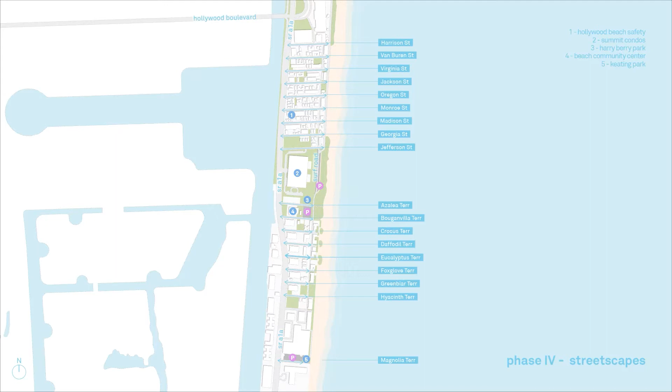Hello and welcome to the Eucalyptus Terrace Undergrounding of Overhead Utilities and Streetscape Beautification's Conceptual Design. In this video, we will be highlighting the upcoming changes occurring on this street during the Phase 4 Undergrounding of Overhead Utilities and Streetscape Beautification project.

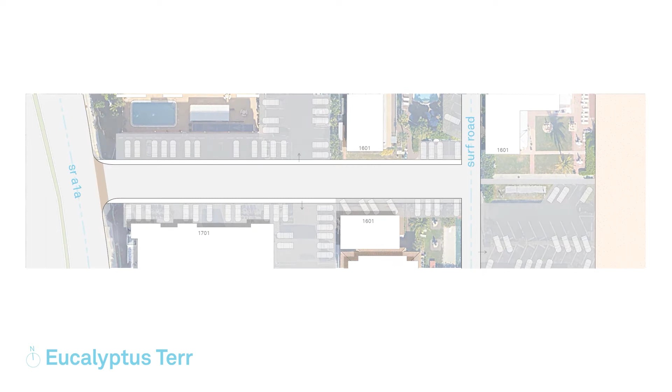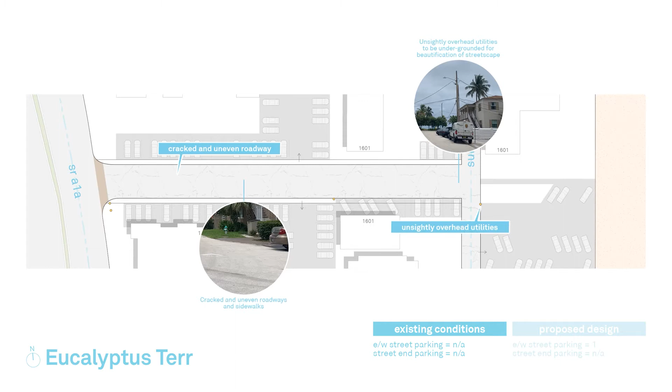These images illustrate the existing conditions both at the street and the street end. The information provided is based on conceptual designs and is subject to minor revisions during the engineering, regulatory, and construction design phase. Currently on the street, there are unsightly overhead utilities along with damaged patches of asphalt on the roadways and sidewalks. The existing streets are two-way traffic with parking on both sides of the street.

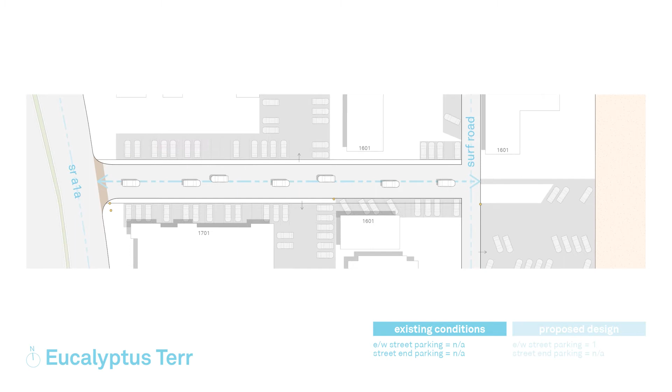Due to the nature of implementing the undergrounding of overhead utilities and streetscape beautification, the parking spaces, regulatory agency oversight, public lighting, and landscape improvements will be markedly different than the current conditions as seen today. Each street is a custom design based on existing conditions. The proposed design will incorporate newly constructed sidewalks and roadways with brand new paving that will extend onto the street end.

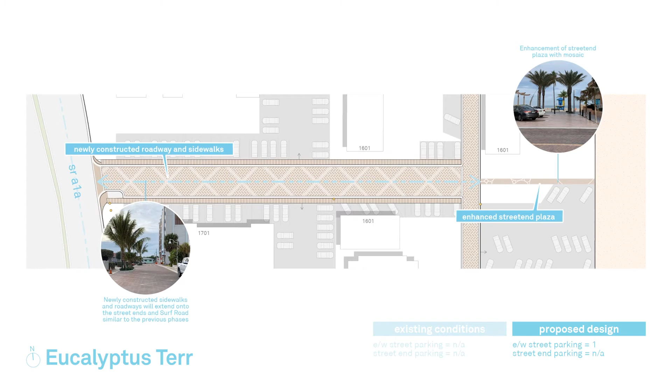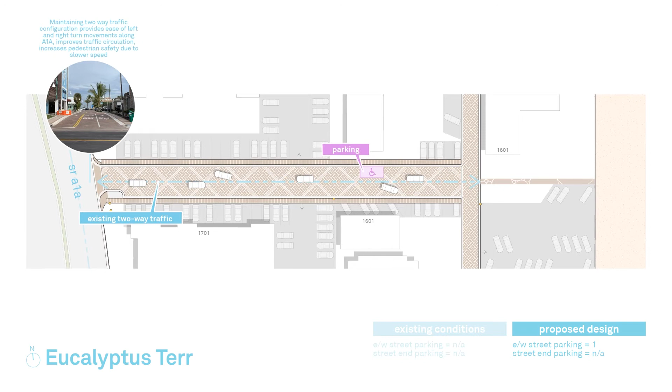The photos shown depict images of the completed streetscape from previous phases 1 through phase 3 and are an example of the same types of lighting, hardscape, landscape, and streetscape improvements that will be implemented on this street and the entire phase 4. As requested by the community, the current traffic pattern is being maintained, i.e., the two-way traffic with a single lane in each direction and parking on both sides of the street. Existing driveways will act as natural yield spaces, an area where a car can pull into to allow another vehicle to pass by.

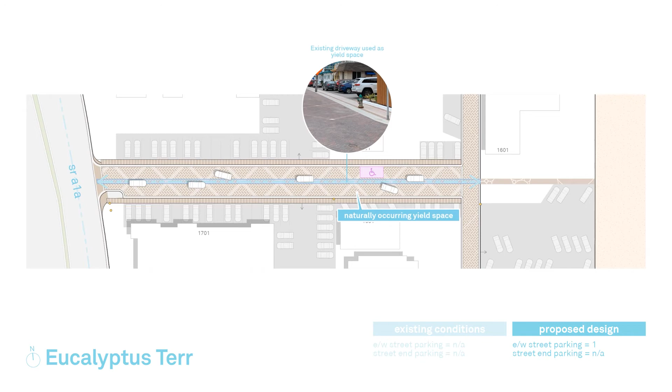Encroachments into the right-of-way have been addressed by the city passing an ordinance reducing the amount of space required on private property for parking, i.e., if there is 16 feet 0 inches in a perpendicular configuration and/or 8 feet 6 inches for a parallel parking space, then these spaces will continue to function as parking on private property. In addition, if private property owners have wheel stops or small garden walls which can be reconfigured to allow for additional private parking, CRA staff will meet with those private property owners.

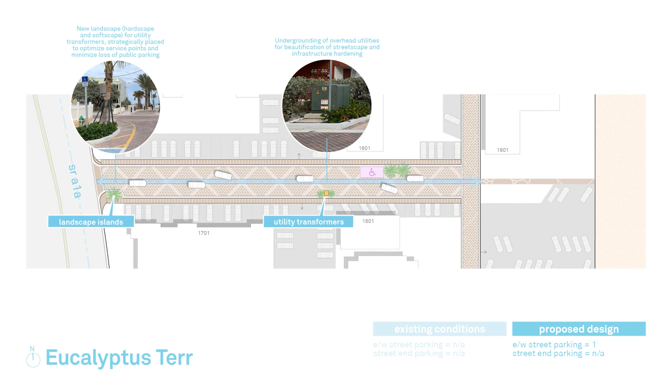The undergrounding of overhead utilities will result in utility transformers that will be placed in strategically located landscape islands to optimize service points to adjacent properties and minimize the loss of public parking spaces. Street lighting will also be upgraded to LED marine turtle-friendly lights as seen in the previously completed streetscape projects from Tyler Street to Thomas Street and Iris and Jasmine Terraces.

The design of each street maximizes retaining as many public parking spaces as possible, while dedicating the areas needed for transformers as part of the undergrounding of overhead utilities. For Eucalyptus Terrace specifically, these regulations allow the addition of 1 new parking space.